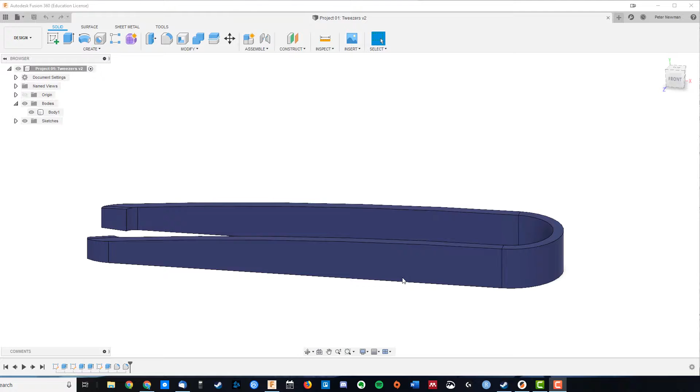Okay, so we're going to get into our first project. We're going to be designing some tweezers. This is a great project because it's going to take us through some of those basic tools that we're going to use time and time again. So the first thing to know is that just navigating around, using that middle mouse button, you can move around, but if you want to pan or orbit, hold in Shift to move that around like that.

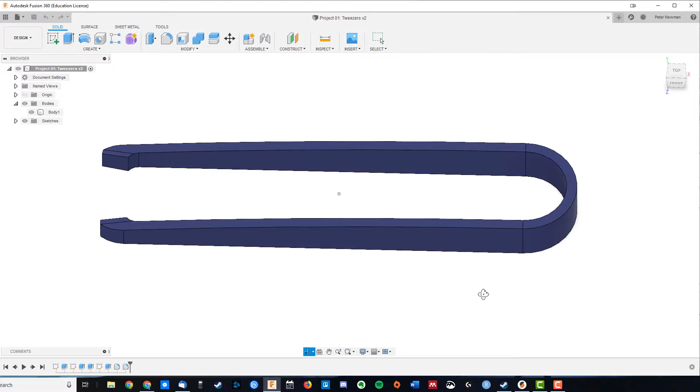Okay, so we're going to start with making a new design, and the best thing to do straight away is to save it, so Control S. And we're going to save that as Tweezers prototype, something like that. And that means that Fusion 360 can immediately start auto-saving, so that if it does crash, which it does from time to time, you don't lose everything.

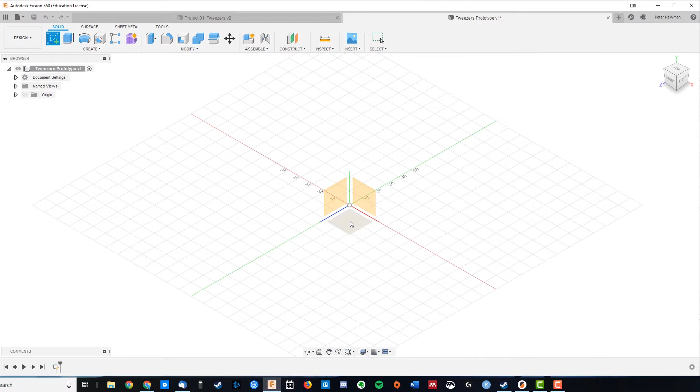So, the basic workflow is always that you go from a sketch into bodies. So we're going to start with drawing a sketch. Most of my sketch tools are in this menu here. We're going to choose a plane, and see we've got this cube at the top here that tells us where we're looking. So let's choose that bottom plane there. We're looking at it from the top down, and I'm now inside a sketch, right? And you'll always know because you've got this green tick in the corner here.

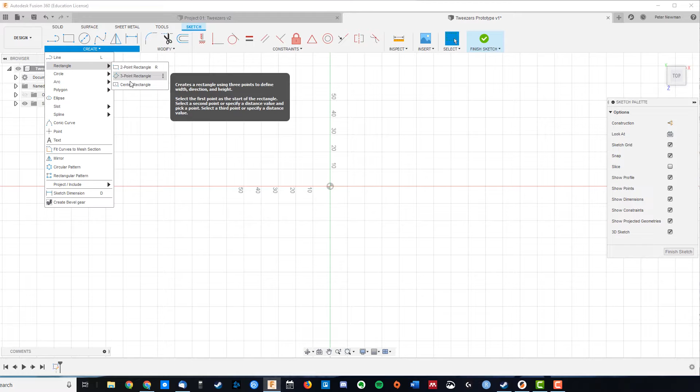So we're going to start with creating the outline of our tweezers, and for this I want a center rectangle. You can see you've got all these different options, and those options even tell you how to use them. So a center rectangle, we're going to choose the center point, and already I've got a couple of dialog boxes. These are our dimensions. I want 20mm by 80mm. You just type them in, hit enter.

And now we've got an enclosed shape, you know, because you've got yellow on the inside, and we've got our line around the outside. These lines here are construction lines. They're going to be really helpful later for specifying geometry without it actually being part of the design. So if that's the outline, we need the curve because we're going to use the flexibility of that PLA plastic to allow us to squeeze these tweezers shut.

So I'm going to come across to arc, and what I want is a 3-point arc. You can see you start to snap to different parts of the grid. So snapping to that corner, and as I bring it out, it even snaps to when it's a half circle. Now, at the moment, I've got two different shapes. Now, I don't want to just bring out this whole block. I want to add some thickness to the arms. So what I'm going to do is use an offset.

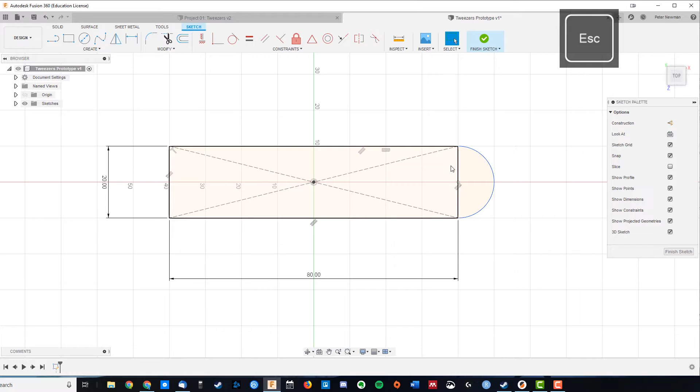Right, so we're going to trace all the way around, but the fact that we have two different shapes is a bit of a problem because offsets only work on the one shape. So to get rid of that line, I can either make it into a construction line, or I can come up here for trim. And the shortcut for that is T. And that allows me to remove that geometry, which means that, again, we now have one big shape.

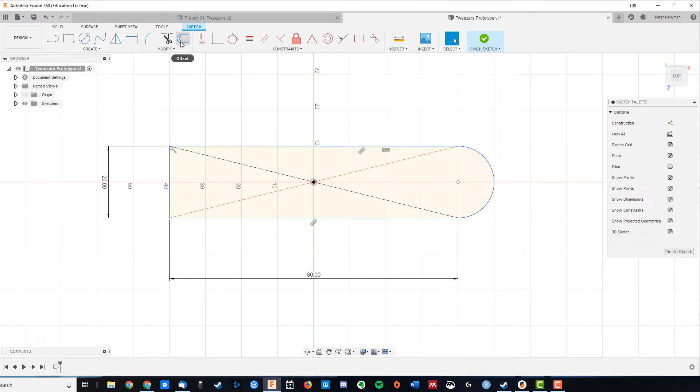So, using our offset tool, this is one we'll use all the time, O for offset, and now you can see you can add some thickness, and it's offset of -2, the minus is just telling you the direction, and now we've got our outline. What's really handy is that if we change these dimensions, that offset will still remain at 2mm.

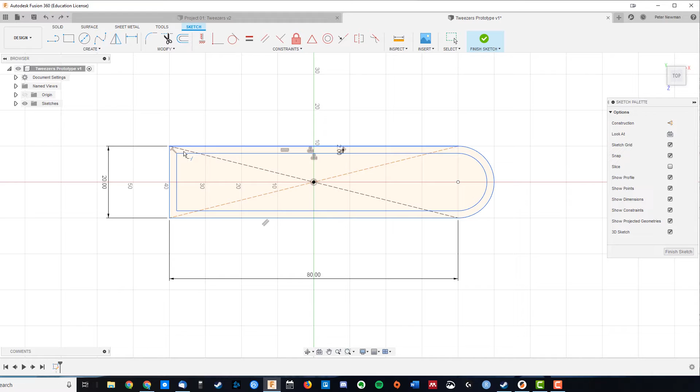Now I don't want these connected at the end, so to close those off, I could use the line tool, but I can also come up to modify and click extend. And now you can see it extends that line to the nearest line. Again, I want to trim those out, T for trim, and now we've got white space, which tells us that it's no longer part of our sketch.

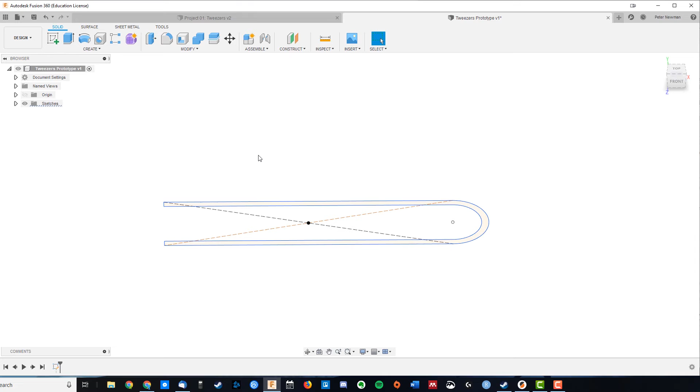So if I finish the sketch at this point, I've just got this drawing, it's on the bottom plane, and now we get to see how you create three-dimensional bodies. So you come up here, create, extrude, and again, this is a really common one, so it's good to give it its own shortcut, which is E. We've got lots of different options over here, but what we want is to bring that up to, let's say, 8mm.

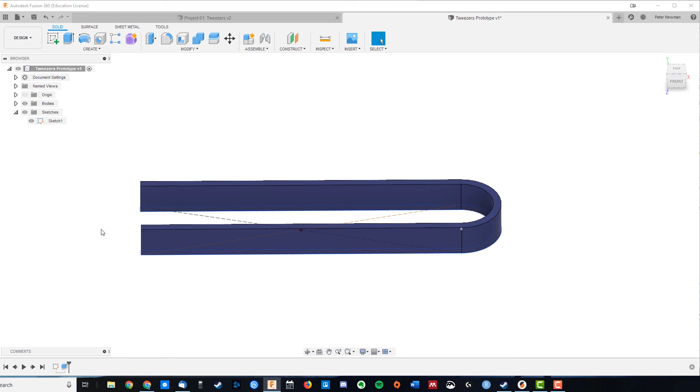Awesome. The sketch is hidden. There's the profile still underneath. Turn off the bodies, and we can see where our body is coming from. From sketches, we create bodies. Bodies we can organize into components, and components can be assembled together, and we'll see how to do that a little bit later.